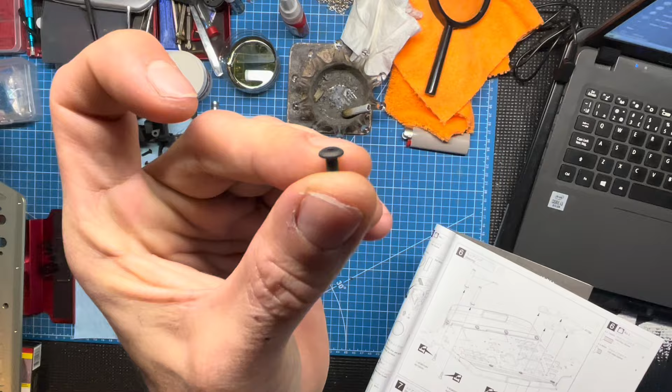No big deal, we got some fun going on. We're moving on to bag two. What I like to do is open the bag, situate the contents and hardware, and make sure everything is there. We got two 4x10mm hex screws, two button cap screws, and 8 of these guys which are slightly different - if you notice the head is like this. These are for the side guard, should be 8 of these. You should have four 4x6mm screws for the motor mount plates. We're going to be putting together the servo saver, Ackerman arm, motor mount plate, and the side guards. Let's get to it.

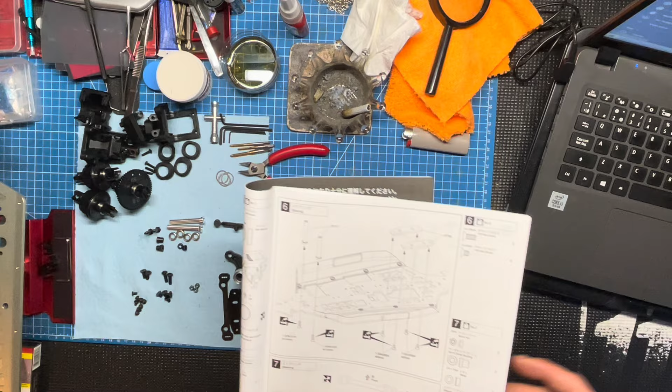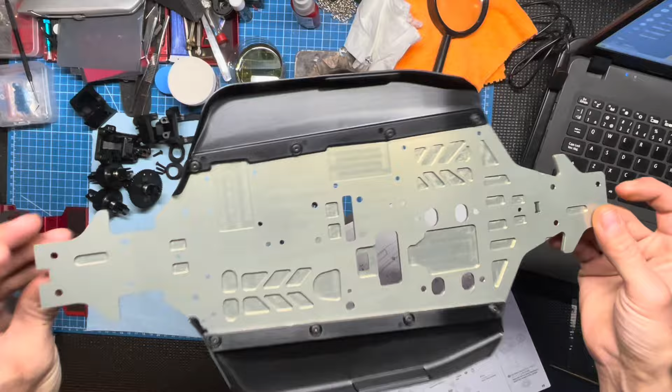Once you have your side guard on, it should look something like this - very nice with the carbon bottom. Make sure your screw, you don't have to tighten it, just snug, two-finger, bam bam. That's it, just make sure you're fully seated properly on all your edges.

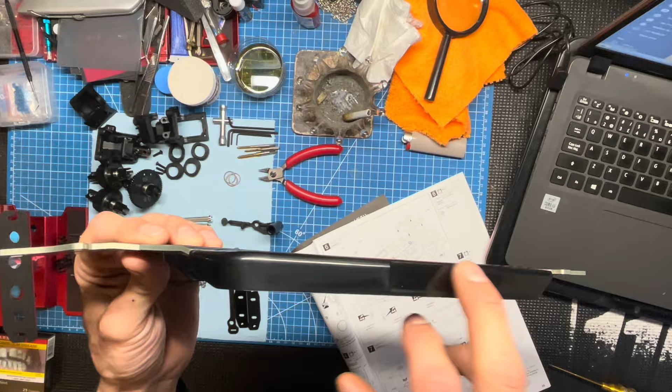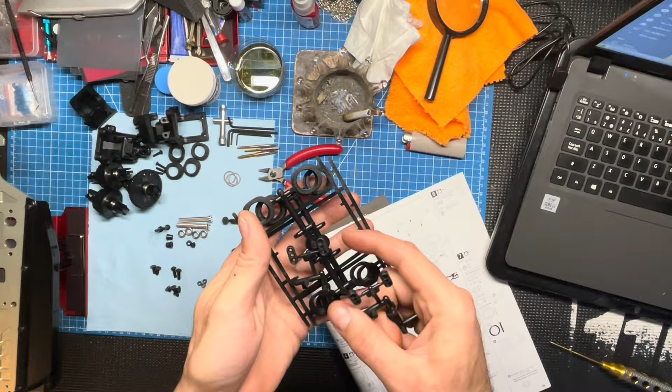The bag also comes with some Velcro for later on when you put the body on. That's no problem, keep it all for later. Remember, any excess trees you have, don't throw them away until you're done, because you will need to go back to them - like the tree for bag one with the diffs also has the little carriers for the sway bar, so make sure you don't throw any of this stuff out. You will need to come back to it.

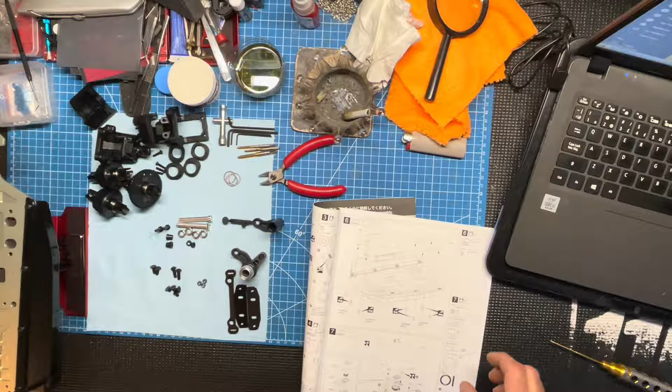Alright, so we got our side guards on, everything's good to go. Next, we're going to install the two steering posts with the two 4x10mm screws. And don't forget to put your Loctite. Be back in a sec.

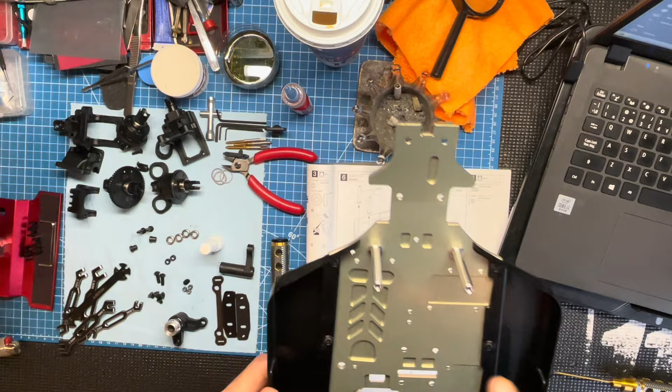Okay, so once you got your steering posts on, it should be looking like this - right, you got your two screws there. Should be looking like this.

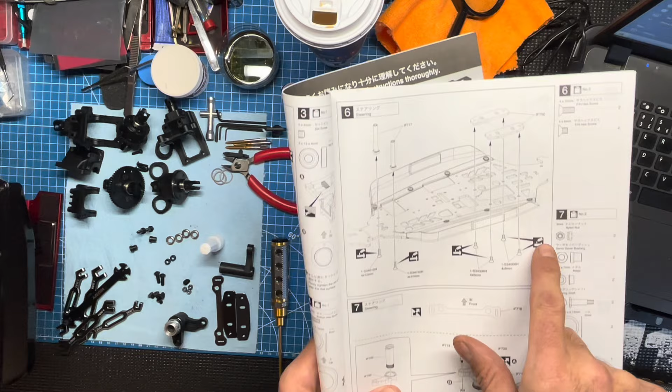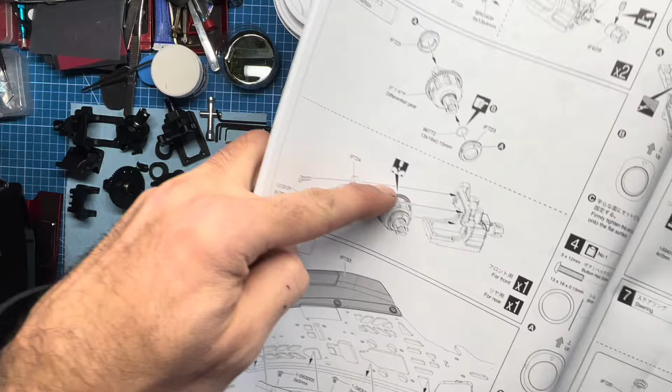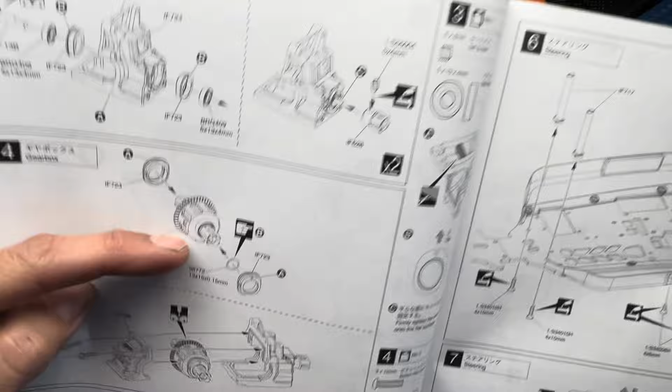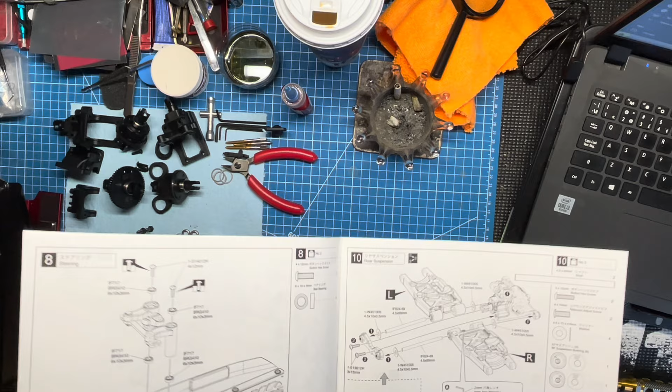Now another thing I'd like to bring across is you should know what all these symbols mean. Like this means Loctite, right? Like this means discard, you know what I mean? This means you gotta put grease or oil. This guy means pay attention to figure B, picture B. And then you got a bunch of different symbols that are very important that you know what they mean, like directional - right, left, and right, stuff like that. Just want to bring that across to you.

Okay, so next is the steering servo saver. On the steering arm, make sure this part is facing towards the front. There's no top and bottom, right? So they want it sitting like this, side to the front of the buggy, with all your steering arm and servo saver.

We got all our bearings and inserts, and it's just basically follow the instructions step by step. I like to put a little dab of grease on the sleeves here on these bolts and the collars.

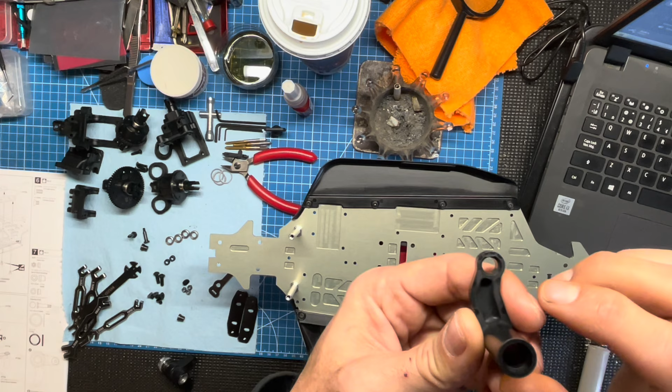Let's get to it. Okay, so the first part here, if you notice the underside, there's a flat side and it's beveled, sunk in. We're going to take one of the bushings, make sure you line up the flat side underneath and press it in. Make sure it's all the way seated down, just like that. And then this will go like this, facing forward.

Then we're going to take one of these guys, and like I said, I like to just put the tiniest dab of grease, like the tiniest, on either end of it.

You're going to take that, slide this through the other bushing, slide it down. We're going to take the steering arm, remember this way's forward. We're going to come down through the big hole. And we have another bushing that goes underneath, it's a metal bushing again.

Make sure you got a little bit of grease, just need a very tiny amount. When it turns, it'll get all around it. Get that over there, this goes in from underneath. Give it a turn, smear the grease in there.

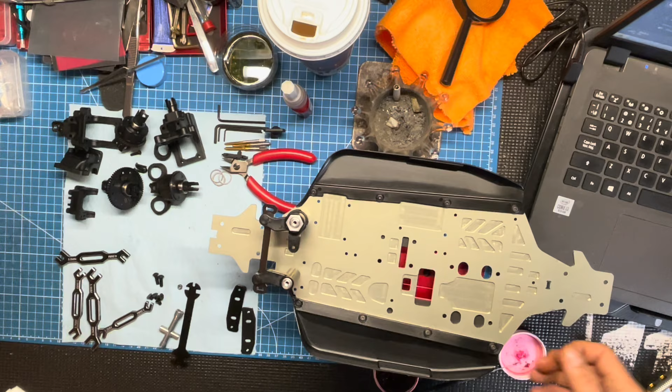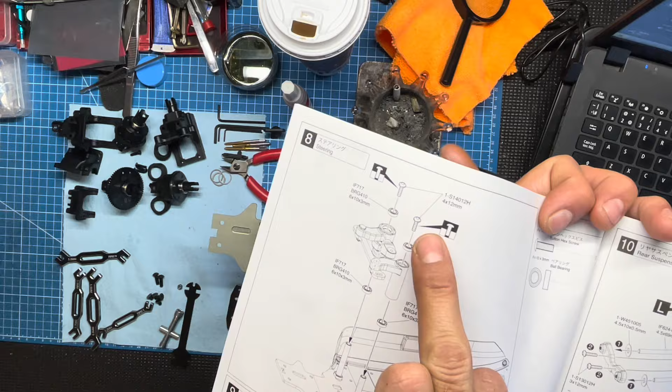Okay, once you get your steering arm and abutment down, you should be looking like this. And this symbol means do not tighten all the way down these bolts, you'll tighten them later, that's what that means. So you just don't put Loctite on anything right now, just bring them down till they're almost snug and leave it like that.

And okay, once bag 2 is completed, you should be looking like this. Motor mount plates and your steering mechanism, the initial build of it, like this. Remember to leave these 2 loose, and that's it.

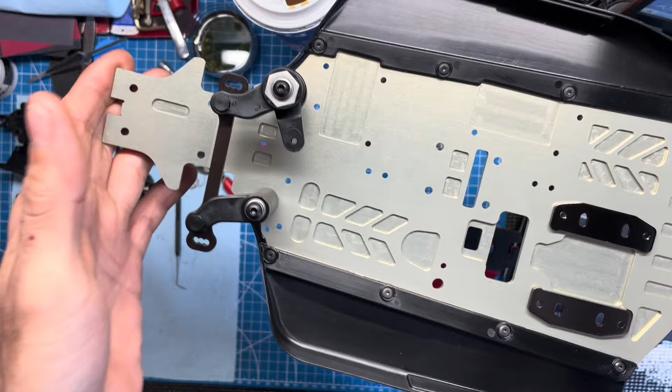And now we'll be moving on to bag 3, which will be the rear bulkhead, putting it together and shimming the rear diff, which I put 10K fluid in the rear diff and 5K in the front, which I didn't show in the previous videos. Stay tuned, moving on to bag 3.